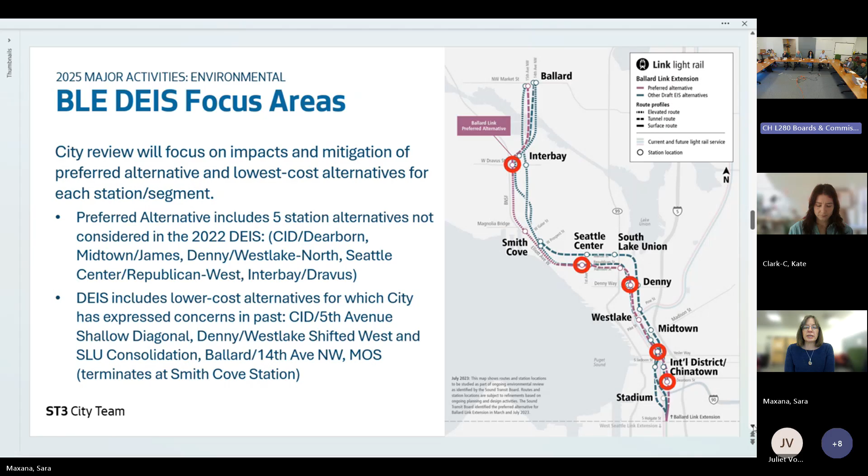That includes the Fifth Avenue shallow diagonal alternative for the Chinatown International District Station, the Denny Westlake Shifted West, which is the consolidation with South Lake Union, the Ballard at 14th Ave Northwest, and the minimal operable segment, which is a termination at Smith Cove.

Just to put a fine point on this one in particular, the enterprise initiative progressing at the Sound Transit Board level is starting to discuss cost-saving strategies for the capital program by project. Earlier this week we saw a memo sent to board members with updated cost estimates by project, including some cost-saving strategies that could help address the affordability gap. For Ballard Link Extension, this is one of them.

The preferred alternative, shown on top, is for the downtown tunnel alignment and includes 5 stations, including Denny—in this picture it's the DT1 Denny just south of Denny—and maybe the preferred alternative has Denny shifted north, and the South Lake Union station at 7th and Harrison.

However, there is also in the DEIS an alternative that would consolidate the Denny and South Lake Union stations into one station at Denny shifted west. We think that station would clearly offer a lot of cost savings to the capital program, and would minimize some of the risk and construction impacts that we know from our review of this alternative earlier in the process.

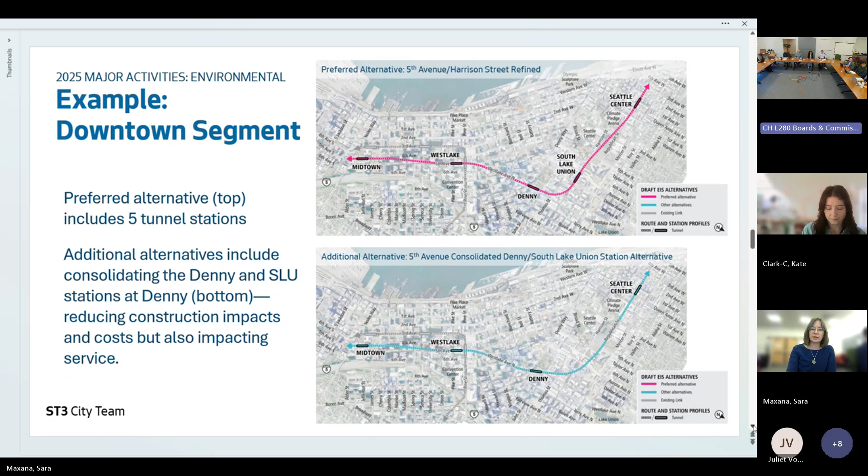Whew, maybe I'm going to take a break from talking for a moment here.

Question: in what you went over for downtown, are you including the potential for not building one of the new tunnels—isn't that the most radical cost-saving proposal? Is that in this list or not?

It's not there at this time. That is not in this list right now, in the scope of looking at the DEIS. Our understanding is that's a very new idea that has been discussed at the board. We expect through the enterprise initiative there will be a moment, maybe sometime next year, when that idea gets some analysis, and the city will very much want to be at the table to talk about it. We're not expecting that in the DEIS—the DEIS only includes what the board adopted back in 2023 for study.

It's fair to say that if that idea had legs—which I won't share my opinion on—it would drastically change the Ballard Link Extension. That's a significant change. Yes. Okay, thanks.

All right. I'll go through the slide and then let you embellish, Eric.

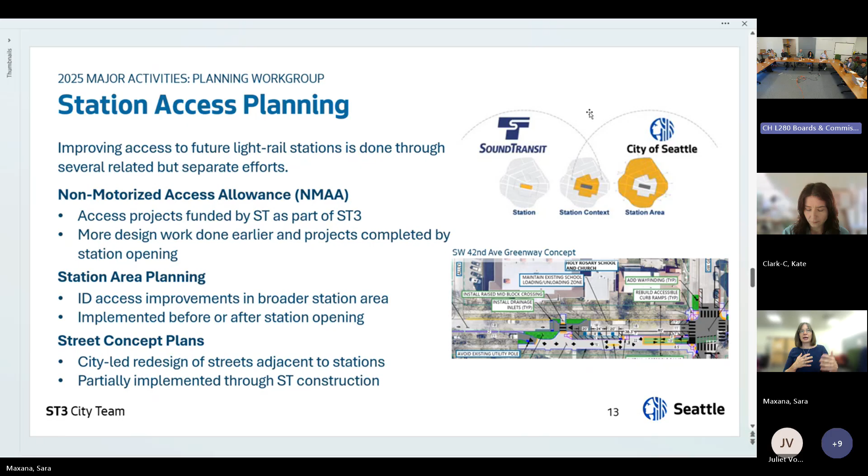As the Sound Transit Board right now is discussing major cost-saving strategies for West Seattle that could include, as discussed at the board last week, an elimination of the Avalon station, we don't want to be out doing station area planning for a station that's not going to be part of the project. So we are planning some planning activities soon, but feeling this inherent tension of wanting to respond to changes that might be coming through the Sound Transit process.

Just a little more information on the non-motorized access allowance projects. Eric Rundell from our team is working with SDOT policy and planning on the identification of those projects with Sound Transit. For the West Seattle Link Extension, they've done an initial screening and are now in a prioritization step—scoring each of the 9 projects, and then completing conceptual design on all of them.

Again, these projects start from that much longer list of projects that's in the STP. At the Graham Street Station, it's a little bit further back in the process. There's a screening step happening later this fall in tandem with community engagement related to the station area planning efforts. That little table shows the anticipated access allowance dollars available for each project.

Station area planning - we talked back in March and June about our desire to be out in community, starting station area planning for West Seattle and Graham this summer. That has pushed into this fall as we are watching and waiting and learning from the process playing out at the Sound Transit Board. OPCD is leading this effort with SDOT in partnership and supporting roles, complementing community planning that has already happened in a number of these areas, particularly Graham Street. Graham has had a tremendous amount of community visioning over the last 20 years as they've waited and looked for the opportunity to have this infill station.

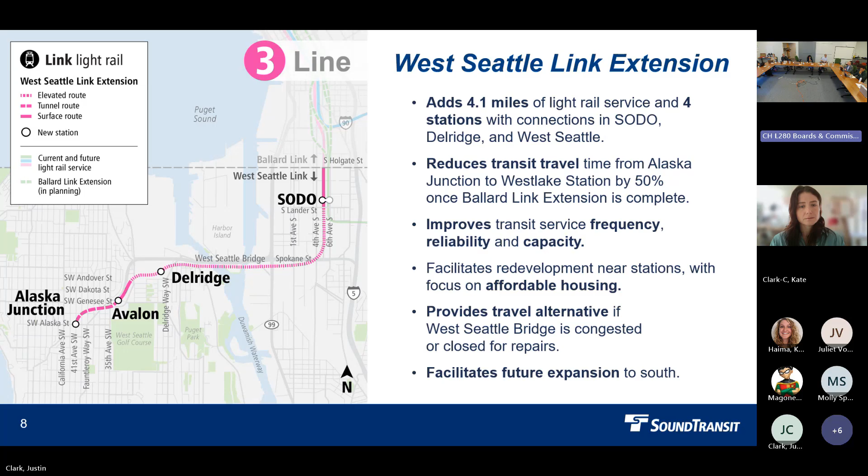And of course, we'll never forget when the West Seattle Bridge was out. It's a really good reminder that resiliency and redundancy is important in the transportation network, so this would provide another way for people to get from West Seattle to Seattle downtown and beyond. One of the things that was part of the ST3 network plan was to consider future expansion to the south. We have some great bus integration with this project, but the ultimate goal would be to service communities south in the peninsula with light rail service that connects the regional network.

Okay, so this is where things get hard, right? About a year ago, we had a new bottoms-up cost estimate—more of a contracting style estimate, the type you would do as you advance design, compared to earlier unit cost and parametric style estimates. At the time, we identified a project cost of about 6.7 to 7.1 billion, with an affordable finance plan of 4.1 billion, looking at that alignment before any cost saving opportunities, whether programmatic or project specific. We've since updated those numbers to 2025 using inflation indices, and updated the finance plan number with assumed revenues.

And so we're looking at these numbers now. This has nothing to do with the scope of the project, just inflation updates. So we're looking at a gap still, but the good news is we have some really good opportunities to bring that cost down. That's what I want to talk about a little bit here.

We're not building it in 2025, so these are 2025 dollars. The board is also presented this in year-of-expenditure dollars, but this is typically how we would track project budgets before their baseline—per year, updated every year. The finance plan number will be updated as well, because those numbers will have changes in inflation as well.

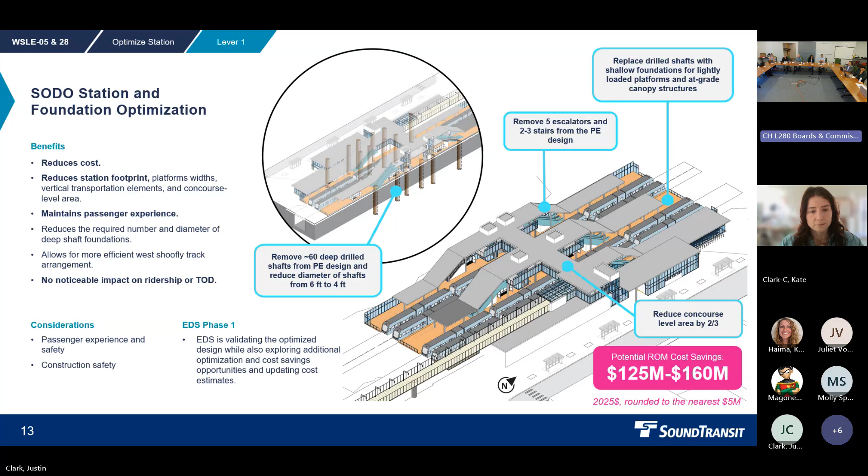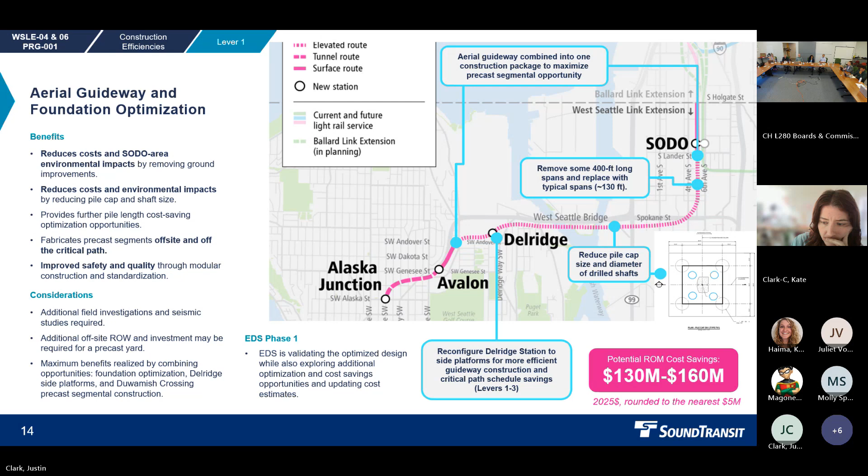So this is at SODO Station. This is a lever 2, so sometimes we certainly have to work with our operations department and consider passenger experience here. You'll recall that in order to build this, we showed a track detour, which we call a shoofly in the EIS. That's essentially building a new track, shown on the right side there, to the east of the existing station, bringing the 1 line through those properties, between Lander and Holgate, and then back to the existing track. This gives us a bit more flexibility in how we build the station, but maintains the 1 line during construction.

So the design team has considered that assumption and the need to keep the 1 line running, but looked at a potential shoofly that would be on the west side of the SODO station. So building the new tracks that would be the permanent tracks for the 3 line, and then utilizing those during station construction.

So we call it the West Shoofly. By doing that, we're able to potentially reduce a large number of property acquisitions that would be necessary for West Seattle. It's worth noting that the Ballard extension is directly north of us, and they're continuing to evaluate the alternatives and the potential effects on those parcels.

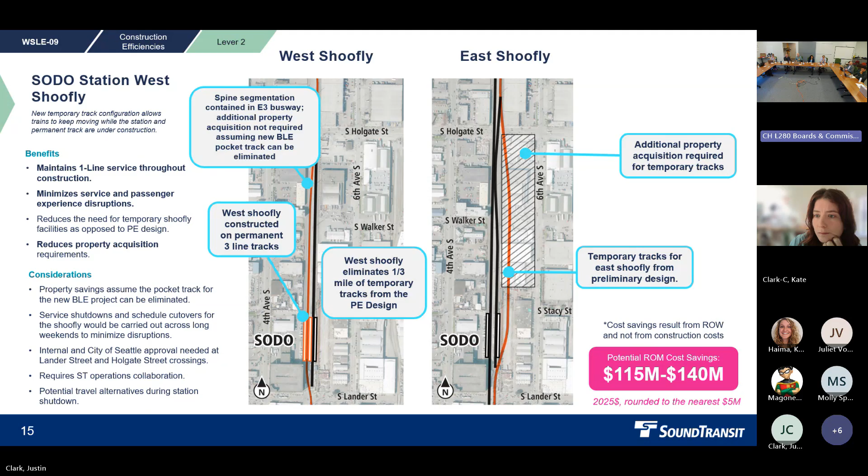But we do see a big reduction in property effects for West Seattle, and Ballard's working to design and also minimize effects and property effects, as you know. So this is a big opportunity that's been validated. It'll be moved forward. Next slide.

Directly to the south of it, we had a crossover to get the trains from one side to the other, and then a tail track where they could store a train or make that movement to come back and continue eastbound serving the passengers. We've looked at a configuration where we can shift a crossover to the north of the station.

We're looking at a modified crossover design. That's one of the reasons why we had coordination with interdepartmental teams. A shorter crossover requires a little bit more maintenance and a little bit different speeds, so we wanted to make sure that this was acceptable. It has been accepted by our service delivery department.

And so by having that on the north side of the station, trains can switch tracks coming into the station, and then we no longer need those tail tracks. What this does is it greatly reduces the amount of cut that we would need to do to build that crossover and the tail tracks south of Edmonds.

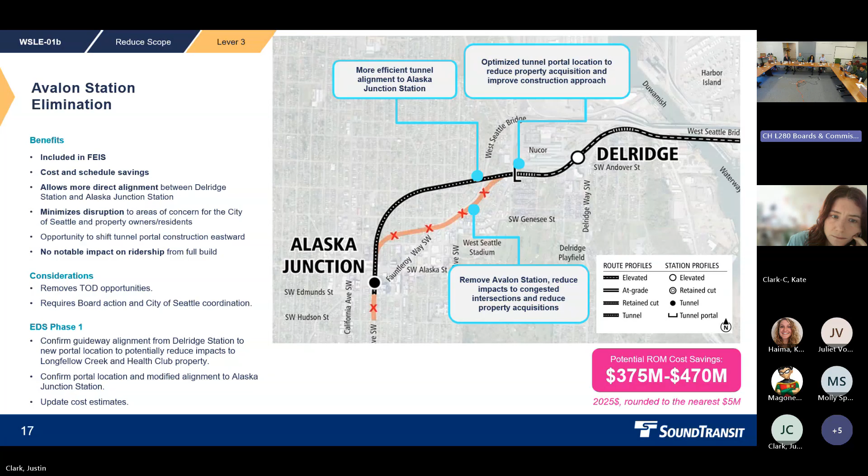Yeah, of course, we're gonna keep going now. I don't want to spend a lot of time on this because it's not our goal, but it's a tool that we have in the tool shed. This is just showing the phased alignment.

An MOS would include a terminus station at Delridge. So it would be SODO to Delridge until Ballard opens, and then Delridge would connect in with the existing system and continue up to UW and beyond for Lynnwood and to Everett.

We showed on lever 4 that this is within the affordable project, and this shows some additional detail on ridership. The full build was 24 to 27,000. For this, we would have 17,000 daily riders, and it would still provide transit integration for communities to the south, White Center, and Burien. We'd have updated bus connectivity into the station, but the good thing is with the PE design, we had some really great transit integration there.

When we think about the work we've done in the community, really understanding the racial equity toolkit focused communities, which is Delridge, and the connection to communities to the south, we'd still be able to provide that connection and a quality transfer there.

Sorry, on that, I imagine the city's pretty heavily engaged in this. Is this essentially saying you're busing to Delridge and then getting on a train, and it's a much different transit answer than a train to West Seattle in general?

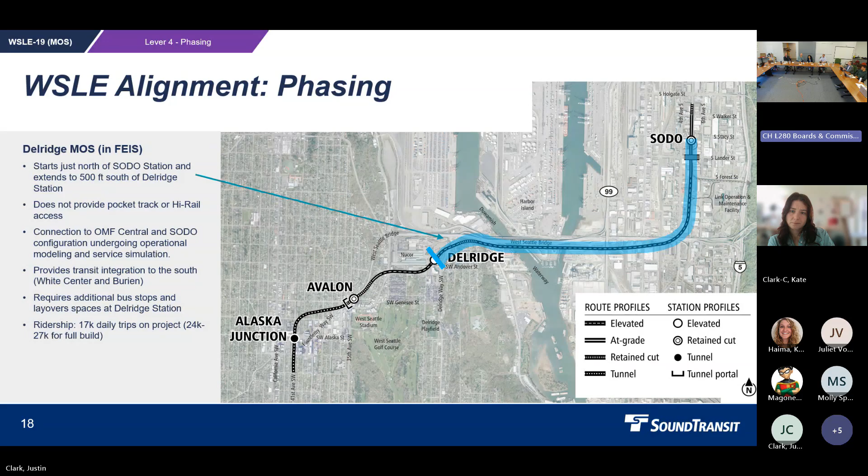These are huge policy questions, so I'd say let's defer other questions and comments. Let's let Justin get through his presentation, and then hopefully we'll have some time to deliberate. We break up at 12, so we're getting close.

Strategic next steps for West Seattle. As I mentioned, we have our final design, phase 1, and the primary goal is to validate and develop cost saving measures.

There's also additional work, as mentioned, continuing to advance designs on some of the early works. The Delridge Connector Trail that was mentioned before is advancing, and we'll have that as an opportunity to review before some of the other station work related to these cost saving measures.

In order to continue advancing these cost saving measures and validating the design, we're going to need to ask our board to approve phase 2, or an extension of phase 1, for the design contract, to keep them in-house and able to continue making progress. That's something we'd expect to bring to the board in the near future.

And then looking at the overall allocated budget for the project and how we can keep things moving while demonstrating this project can fit within the affordable and enterprise level funding for ST3 and overall agency affordability. By keeping things moving, we're able to maintain our schedule, or at least the best schedule we've had in light of these challenges.

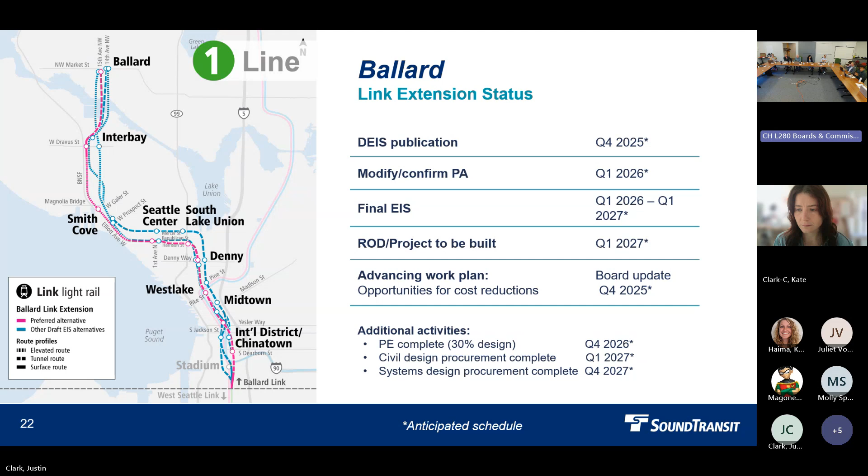Maybe on this next slide, I'll just show that similar schedule of what's been happening on the Ballard extension. We have the environmental review process on top, and in parallel, the preliminary engineering effort is ongoing - that's where the cost optimization effort is happening for Ballard.

I'll just note that for West Seattle and Everett Link, the optimization effort was presented to the System Expansion Committee last week. The rest of the ST3 projects will be presented over the next few months - Ballard and Tacoma Dome Link are slated for October, November.

That will set the stage for our next quarterly update to share more details in a similar fashion to what West Seattle was able to share today, on some of those optimization alternatives that are helping the Ballard Link extension also get closer and closer to being financed.

So, with that, I'd like to open it up to any questions that you have. Thank you - that's a lot of information.

But it's fair to say these are huge questions for both Sound Transit and the city. To just the point Justin made, these are agency-wide questions for Sound Transit for the whole system - this isn't just about West Seattle, it's about Everett Link, it's about the BRT project I presume, it's really about the whole ST3 program. Reminder that we have to understand this in that context, because that's just the reality, and that the board is a three-county agency that has all of those priorities.